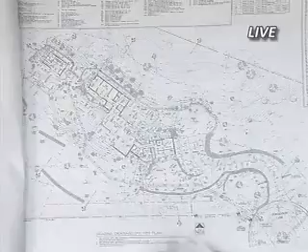And Mike's got all the calculations that are needed. Yeah, we turned that in to whoever needed that. Who would that be? The planning, I guess. And Jaime, I guess, has reviewed that. So as we have this site plan out, we'll go to the architecture and come back to the landscape plan.

But what we have is this gate. I'm not sure that we had it on there last time, so we're going to be adding this gate, and it's coming over 20 feet, so cars can pull up in here. This is just a refined grading plan, basically what we had last time, but now the engineer has gone over all of it. And landscape plan to go with it. Cabana's out here. Nothing has changed as far as the location of things. It's just been refined here. Okay.

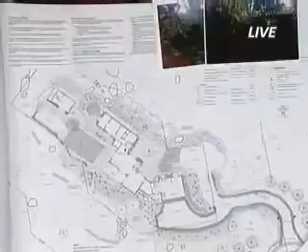Do you want to do landscape first or last? Does it matter? If we could do landscape, yeah. Okay. So, once again, what we were trying to do was keep most of the site, which is 4 acres, of the rocks and the grasses and the oak trees. That was the goal. However, we were unable to do that right at the house, and we did have some program things such as a badminton court in a flat area. So we've kept all the landscaping within this graded area. After that, it just stays the same. It gets weed whacked every June.

So with the graded areas, the cut and the fill areas, the theme has been using drought-tolerant plants, basically succulents and aloes, euphorbias, and this whole list we've put on here. Besides those areas, we have the turf areas for the badminton court, and some transitional turf areas on a bigger slope, which is, Brooke, what do we have on those? Carex praegracilis. It's a native field sedge. It's around the lawn area and in the courtyard, and then up in this area here.

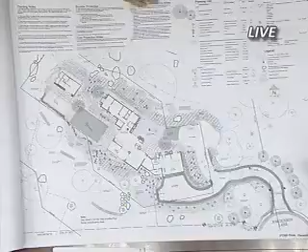We have, between the turfs and the succulents, a few specimen trees, jacarandas, and then a lot of flagstone. And then it fades into a seeded area of native grasses and flowers into what is now, let's call it, naturalized grasses. We're moving whatever boulders we get here and can save all the ones that are exposed with lichens and all those great things. We're going to carefully pile them up and put them back into the landscape.

So we don't have a lot of drip irrigation. We have drip irrigation—where is that? Where did I find that? Next one.

We have it set up for any native plants or plants that need it to start growing, but that's really the main purpose of it. We'll have it for the specimen trees, but most of the succulent area doesn't need it and is actually problematic with too much water. So we've got zones ready for drip irrigation.

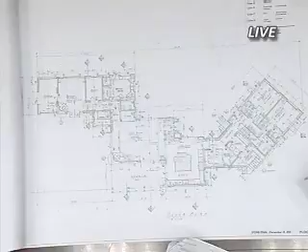On to the architecture. This is what you saw before, but in a little more detail. We've got all the structural plans to go with it. We've got the kids' bedroom wing with a garage and basement underneath that wing. Everything else is slab-on-grade. Master bedroom wing and the loggia, sort of the main room out front. These are little loft spaces. Here's the garage and the basement area, which is buried. This really hasn't changed much.

It's all two-piece Mexican tile, handmade Mexican tile on top. Door schedules—garage doors are a wood 3-panel raised door.

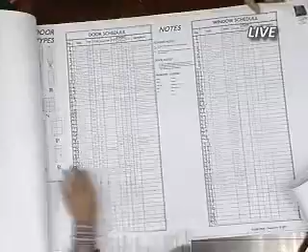We were asked to bring in some tile samples and plaster samples. So the plaster color is this—it's the body color, we had it made for this job. It actually gets a lot more mottled. It's so rich that as you put it on, it doesn't look like it was just painted. It varies, which is what we're looking for.

We have tile covering this bridge area here, which I'll show you, in these colors. And then we have the entry—around the entry vestibule are a mixture of these. We have full color drawings coming up here.

We've submitted a color board. I don't see it over here—is it? Okay, so if you want to look at that, why don't we pull that out now, since we're on colors.

So we have plaster. The windows are a dark color because we're really going to play off all these plants and the greens on the property. The ironwork is a dark purple, the lamp ironwork is black, and the colored concrete is a sort of mix—the loggia, which is all poured concrete, has colors taken out of the plaster.

Cross sections, I think we looked at all those last time. The entry is somewhere hidden here—where did I put that entry? Here. Tile entry here would have these tiles all over it.

There's the cabana with photovoltaic cells on the roof. We've got an option for them if we can afford them. This is just to give you the overall plan—I did make a few changes on this. It's confusing looking at those quarter-inch drawings; for instance, that one went down, and it did on the last plans too. That turned square. But basically, there's the size of the building, all together in one piece.

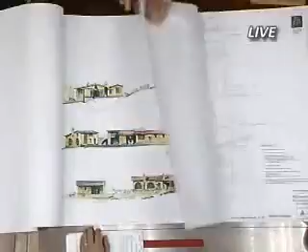Details—these eave details have a tile like this underneath that wraps here. This part gets covered by the gutter, but you can see it from underneath. Here it is.

The walls are all 12 inches thick, plus the plaster, so they end up being almost 14. These are the weep screed details with this 3/4 inch paver. Just some general idea of the plaster—we'll take care of that in the field, but that gets them in the ballpark.

Fireplaces—interiors you probably don't care about. Exteriors are simple, a copper lid here. Then here's a whirligig you asked me to draw—it's a bicycle wheel or something with tuna cans on it. That's over the kids' room.

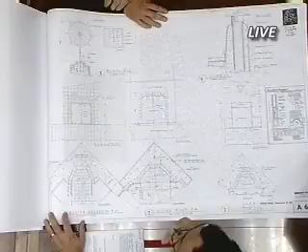Actually, I noticed, I opened this up today, and this is actually the entry—these two tiles go switched. This one goes here, and this one is here. So the tiles got flopped. This is around the entry, and this is on the bridge in the eaves. So when you take a set, take this one—it's got that mark on it.

Lamps we went over last time. The main thing is there's amber glass in here, so we don't get any light shooting across the property.

We've got the balcony over at the kids' room, which is this one, and also the guardrail that goes around the deck. There's all this 1 inch—what would we end up doing? A 3/4 inch rod.

Here's the front gate on sheet 7.2—that's the entry gate, it's the Corten. It's 5 feet tall, solid, that will roll past. We've got some very loose stone walls on either side of it with 3/4 inch rebar sticking up through it, but it'll rust also.

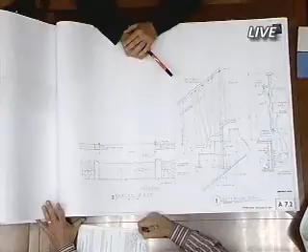And we have a whole set of engineering drawings. Our main concrete work is on S2.0. It shows the retaining we need to do in order to sneak this garage in. The rest of it is on a flat pad and is slab on grade. So you're welcome to go through those, but it's basically what you just saw.

Anything else for your presentation? I think that's it. Okay, so I'll go to the staff and see if they have comments. Has staff reviewed these drawings, the ones that are on the desk right now, other than that one detail sheet that just came in? Okay.

I will go to public comment. Is there anybody here that would like to speak on the project? I don't have any slips. Nobody's standing up, so I'll bring it back to staff for their recognition of a letter for our file.

Thank you, Mr. Chair. I just wanted to bring to the board's attention, we received a letter from Jill Stein and David Unger, a neighbor at 575 Mountain Drive. This is their second letter received for this project. The first letter was actually received the day after the first initial hearing back in April. They just wanted to highlight some of their continuing concerns, primarily the neighborhood compatibility for a two-story design in a dominantly one-story neighborhood. They have concerns with their potential loss of private views, and of course acknowledge that the board has limited jurisdiction over private views.

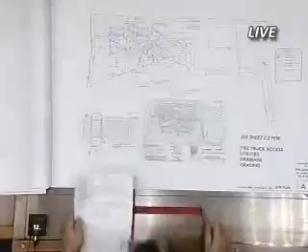There's a 5-foot fence, and it connects, goes right to there. And then on this side, that's the fence connection, goes up to here. Okay, all right, and that's the fence. We'd rather not have a fence, but we need a fence for the pool. So we're having that fence here.

Our idea wasn't to fence the whole property, it was to keep it more casual as you drove in. I should have shown that fading off, this stone fading off. The idea is mainly to keep people from parking their car and just wandering through. This isn't a code requirement here.

Okay, Fred, you had some questions? Yes, Mr. Chair, just to help address the neighbor letter. Jeff, could you point out on sheet A1.2 where the neighbor is that wrote the letter? Do we know where that neighbor is? I just heard this letter for the first time, so I imagine it's one of these houses on Mountain Drive. Are these addressed on Mountain Drive here? Yeah, 575 Mountain Drive is the address. I couldn't tell you, that's a surprise because this whole thing was...

The only reason I'm asking is the issue of story poles came in their letter, and certainly this board could ask you to do story poles, but on the other hand we've had circumstances where people write letters in, and it turns out if you go out and look at the site, they don't even see the site. So that's why I was trying to figure out where this person was that was writing the letter.

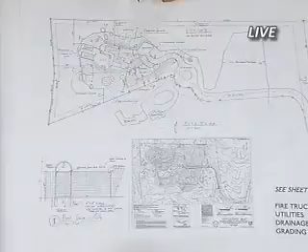Okay, and what kind of windows are you using? They're aluminum-clad wood windows, probably Eagle windows. Yeah, and that's a piece from the Eagle catalog. And are you using the traditional detailing on the windows? I know that some of them come fairly wide, and others the division is smaller. I usually use the 1-inch detail, and then I use the square on the inside.

Is that traditional? I don't know. That house is over here, by the way. That 575 is not in view, it's over by the road, so the people who would... that's downhill, you can't see it. These houses are the closest houses. I think what we have to do is make a comment as a board that we made our decision, and we didn't think the requirement to have story poles was something we needed to decide, unless somebody feels differently, but I think it was this board that voted on this project.

So has Ann Marks looked at your landscape plan? No, has she looked at it yet? No, I don't think she has.

Light construction, comp shingles, very, very simple house. The neighborhood looks like this. This is the existing house, and this is looking down to the left of the existing house. This kind of turns the corner, as you can see slightly. Here's a shot looking the other direction towards the east.

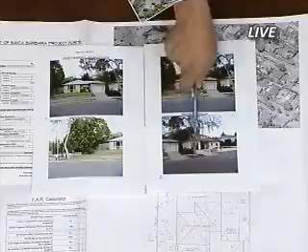There's the house, and then as you can see, there's the garage, the single-car garage, and then looking a little to the east, that was a one-story house that's got a little two-story addition recently remodeled. Looking further to the west, this is the neighboring house, which is really sort of engulfed with vegetation. It's a cute little house that sits right where San Miguel kind of turns slightly. And then further down San Miguel, this is a two-story house that's been around for a while.

Let's see, looking right across the street, these are homes, one-story homes right across the street on San Miguel. And then this is looking down Las Ondas, and there's another neighboring two-story home on the bottom of the page there. That should give a little neighborhood context.

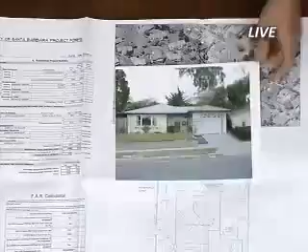I've got some photos of the home I'll go through quickly so we can kind of see what we're dealing with. This is the one-story plastered home, 2x4 construction. Some windows have been upgraded. The existing frontage is original. So slab on grade, very simple home. Some more shots. This is the front, where the sidewalk meets a low retaining wall.

This is a shot looking down into the side yard on the west side. There's a shed structure that's being removed that was placed without a permit. This is the side yard looking down the east side, the neighboring home there, and the gates going into the neighboring yard as well. And then this is a shot looking back into the rear yard.

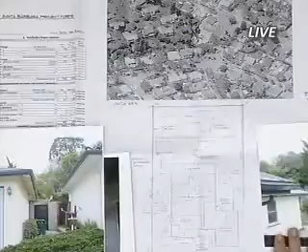So the idea here is to add a master suite. It's a small second-story addition, and basically keep the existing floor plan right intact. Really very little is happening to the floor plan on the existing residence. You can see on the first floor plan here, we've got really the bulk of the house stays as it is. Of course, the interiors will be updated, but the stud walls and structure will stay the same.

The staircase is to the center of the house. We've got to the west an existing patio where we'll create a new hipped roof over the existing patio, and put in two small back-to-back fireplaces. Let's see, we'll replace the windows and doors, and we'll add a pair of doors out the back of the garage to give access to the rear yard. So in terms of the mass of the first floor, it's really what you're looking at now.

The design approach is to put the master suite right over the center of the building and allow roof line all around it. And the stairway comes up in a position so that you can get to the balcony without going through the master. The master bedroom faces straight out to the south, we'll call it, onto a private terrace. And then to the north and to the east is the master closet and the master bath.

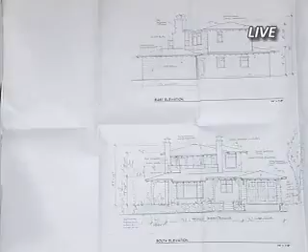The windows will be the prairie-style windows, as you see. We'll put a carriage house door on the garage, comp shingles. The chimneys are smooth plaster, metal casement windows, and then some heavy timber elements such as some corbels and columns. We've got some corbels occurring over the garage door, over some of the eyebrow projections. There's a few eyebrow projections that work their way around at some of the extended roof areas where we need a little sun protection.

The second floor has got a guardrail which consists of a partial solid guardrail and then a narrow band of glass. And you can see that works its way around the east and the west side, but predominantly is exposed on the south side. The west elevation has a heavy timber projected covered patio. And then again, just sort of the mix of the plaster and the horizontal siding. The plates are 9'6" from floor to floor, 3 and 12 pitch. The max height we're dealing with is 21 feet, so it's a pretty low structure.

Second floor, 8-foot plate. I think that's a pretty good description of it. Anything else for your presentation? I think that's it. All right, thank you. Are there any staff comments on this project? It looks like it's ready for action. Yeah, it is ready for action.

I just wanted to bring one aspect up, mostly for the applicant's reference. This was discussed internally by staff, and prior to issuance of a building permit, you'll have to submit a complete demo plan to show that at least 50% of the existing walls are going to remain. Otherwise, you would have to bring your parking into compliance and provide 2 spaces. So at this point, he's provided us a letter that says that 50% or more will remain, but we need to see it in plan.

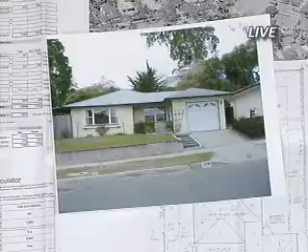Okay. There's a shot of it here. It definitely needs to be updated. Right now, the plan is to just maintain this existing entry. The steps, the location, these would be redone. Whether that wall is replaced or treated is kind of under discussion.

Okay. On your sheet 2.0, if you look at the elevation, it looks like you're proposing to move over the sidewalk a little bit and put a planter between there and the driveway. That's where I saw the note. It says new stone wall. Yeah, and that could be a treated wall, but I need to see where the setback hits that. It's something that we're sorting through.

And then maybe it should have been a question, but a comment on your little westerly patio cover, which is essentially there today. There's a covered patio. Is your intention to leave that open, view from the street, or will there be a little fence around that? I'm looking on the left-hand side of your elevation. Yeah, the intention is to have a fence there, and it shows up on the site plan.

I took it off on the elevation just to look beyond the building. So the way you've drawn it on the site plan, the fence would be kind of right at the patio, not out in front of it a little bit. Yes, exactly. Well, since I started on comments, I'll just go my way and go to Jim. My only two comments on the architecture: I certainly think the bungalow style is probably in keeping with some of the other houses in the neighborhood.

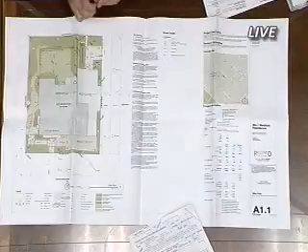Okay. Well, we're looking at an existing residence. It's got a half-exposed basement. It's part of a craftsman bungalow court. We're proposing some changes. The project was owned by a previous owner, and they had started some of the renovation work, and it was purchased mid-renovation, and we're picking up from where it was left off.

And so some of the grading is just fixing drainage in the rear yard. Some of the other exterior changes are removing a fence line along the front here and moving it back to the back corner, replacing some fencing along Olive Street as well, and replacing a guardrail with a fence slash guardrail where there's a big drop off over here.

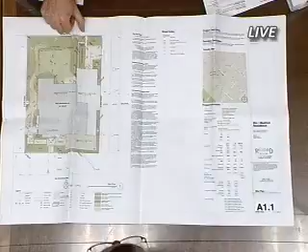So just moving on to the plan. Yes, maybe you might want to walk us through the photos a little bit. Sure, I can do that, yeah. So here are some street elevations.

This is the residence on the corner over here. This is the, let's see, Olive Street elevation. Yep. And then the same view off of Micheltorena. And as you can see, it's almost identical to all the neighboring bungalows. So the renovation is to the upper level, and addition is to the lower level. So the upper level is one bedroom, living, dining, and kitchen.

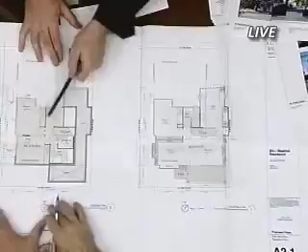We're proposing a new exit out, sort of a back kitchen door to the upper terrace of the yard that then has access out onto Olive Street. On the lower level, it's adding basically two bedrooms and a little study and a bathroom with access to the backyard and then interior access to the upper level. It's a pretty compact living.

Let's see the elevations. We are proposing one new skylight in the kitchen. We've put it on the slope facing the interior yard. So the exterior changes, some of the changes had already taken place. Some of the windows had been replaced, so we're replacing additional windows, keeping with the same color that was picked already. So the front of the residence facing Micheltorena, there's no changes other than color changes proposed.

And going around to the Olive Street elevation, there's a fireplace that's already been demolished. Deleting a window in the kitchen area, replacing a couple of windows here, adding a new window. Where there was a previous window in that location, we're just adding a slightly larger window to serve the kitchen. And then moving on to the interior facing sides of the home. This is an existing window. We're matching it in the bedroom below. We're adding windows on either side of this little projection here. That's these two windows here.

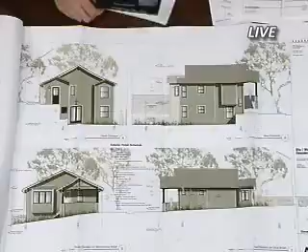And let's see, so adding the additional door downstairs here, that's the one that exits out from the study below, and that's the new back door from the upper terrace and leading out to Olive Street. I think basically the addition is entirely within the volume of the existing residence, so there's no additional volume proposed to the residence. I think that's pretty much it. Okay, so that concludes the presentation.

Are there staff comments on this item? I do see it says zoning modifications, so we'll ask the applicant to kind of walk us through those specifics. Okay. Sure. At this point, I'll open up public comment. I don't have any slips. I don't see anybody jumping up. So I'll close public comment, bring it back to the board for their questions.

Yes, Fred. First at my end. First of all, this is the sad little house that's finally going to get some attention. Every time I drive by it, I want to stop and go fix something on it. Question, on your elevation studies, I couldn't figure out where it was. On your west elevation, there is what appears to be a fence element. Where is that in plan?

Yes, that's the step between the upper and the lower yard. It's basically a guardrail serving the drop-off. So it's right here. Yes. Okay. I'll show you just on the site photos. We've got an existing retaining wall that's in. Here we go. So that's the existing retaining wall. That's the fence that we're replacing, basically, and dressing up this retaining wall in the process.

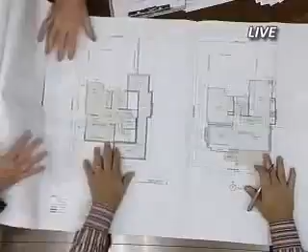What we're proposing is new square footage within the two front yards - one facing Olive Street and one facing Mitchell Terrace. This is all underneath the house, within the volume of the existing residence. So those would be the two areas, basically expanding within the setbacks.

There are a few other items when we start changing elements within those setbacks, such as adding a window, deleting another window, and adding the little kitchen door in the back - those all fall under that as well, requiring approval. Also, that fence you asked about before is within the setback as well, and it exceeds 3.5 feet because it's going down and dressing up the retaining wall.

Any other changes to windows other than on the Olive Street side? Anything on the front side? Is it popping up as a change? It's already been changed, so none of those are requiring a modification. Perhaps this window here, I'm not sure, because it's right at the setback line. So it's a possibility that that could require it. Okay.

So we got our questions out. How about comments? How's the board feeling about this proposal?

Brian? My only comment is I'd like to see how you detail that little stairway coming up, because based on this, it looks kind of spindly compared to the style of the house. I look forward to seeing how that stairway is detailed out. I'm afraid it's going to be two stringers and boards, kind of a 70s look - I'd like to see that avoided, and for you to study this period of time, how they actually constructed stairways to porches, so it's harmonious with the style of the house. Otherwise, I think it's great.

I love it. One comment I'll make is, I don't know if everybody recognized, but this is going to be your house - actually, no. No, I do live in this bungalow court, another house right over here. So it's the same name as - I'm Matt Eastwood, so Matthew Bio is the owner. Okay, yeah, we've got the same first names. Gotcha, okay.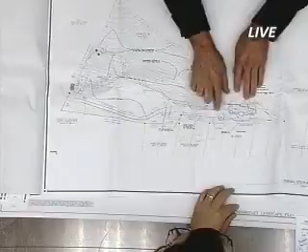This is the last lot at the end of this property. You come down a very long driveway to the buildable envelope. Here you can see the footprint of the house tucked into the side of the hill, an existing oak tree. And what we're intending to do really is take advantage of panoramic ocean views here from the second floor.

We have met with the neighbors already. We had a meeting with them yesterday, had a good turnout, and I think a very good response.

It's the enlarged plan, you can see at the lower floor - again, driveway, colonnade, entry here into the lower level. We have some on-site pathway, boulders and rocks, very natural materials. The lower retaining wall - this portion is a curb really, with a little bit of retention here, your mechanically reinforced earth or your Allan Block. On the back side would be your traditional retaining walls done with CMU, and then probably plastered with a stone cap where they're visible.

This is the original survey.

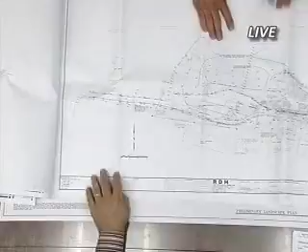Stop me if you have any questions. This is Sam Mathis' preliminary concept drawing for the landscape plan, and Sam has a beautiful colored version he'll present for you underneath there, if you're ready to go to landscape. It's up to you if you want to go there first before the building. Yeah, I think that would be great. Okay, it tells us a lot about the building.

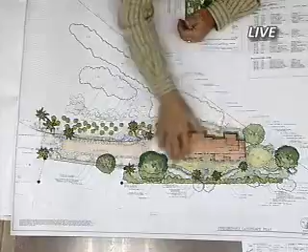So as John mentioned, we're at the end of this long drive, and one of the important things, of course, was screening for the neighbors below and for our property. The existing materials that we'll be keeping, certainly this big oak tree that John mentioned, an avocado tree. There's multiple citrus planted in this area now that we'll be taking up and transplanting into an existing orchard.

That's in the kind of foreground as you approach the house upslope, so we're going to add those citrus into that area and add some more through this access on the back, as John mentioned, to the top deck area from the outside. Coming up from Lou Dillon, there's a beautiful existing drive that has a lot of natural stone walls and Kentia palms and cycads. It's a very handsome entrance approach to this property, and we want to use that theme as kind of our basis of the design of a water-wise, certainly fire-resistant landscape, but kind of in the semi-tropical realm of theme with the Kentia palms, cycads, agave.

We also want to use natives and low-growing ground covers for our fuel management, such as Myoporum and the low-growing Ceanothus. The screening below is important for the neighbors that, as John mentioned, we met with and have worked on very strategically in terms of sight lines and privacy for these backyards, for us looking down and for them looking back. The intent is to use a Prunus lyonii or a Rhamnus alaternus, an Italian buckthorn type of tough hedge that we can let get up to about 10, 12 feet, which is, I think, the ideal height for this important screen below.

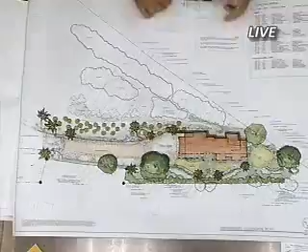I've brought some pictures to show the kinds of planting. Again, real quickly, the Kentia palms, the Trachycarpus palms, the Acacia stenophylla, and maybe the olive. But much of the trees that I show here are going to remain, so we don't need to embellish much except for maybe the palms.

We'll be using, again, ligustrum as well as the Italian buckthorn for hedging. The Rhus ovata is what's really growing on this back slope, so we'll be adding more of that to kind of help retain and look for some substantial erosion control in the upper slope.

We do have a concrete drainage swale to make sure that the house is protected from the sheet flow off this big slope that's behind, but it'll be concealed for the most part with our low-growing ground cover. We'll be using Ceanothus, Yankee Point, and rosemary, and some Acacia redolens to actually hold the bank, but the main ground cover will be the low Myoporum.

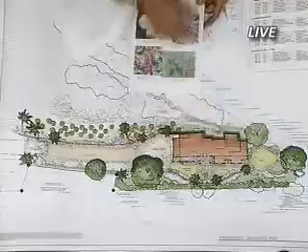Accents would be lavenders and agave and some succulents, some low-growing spreading roses and bougainvilleas on this upper wall and lower wall to kind of cascade over and add to the beautiful theme that John and the clients have asked us to give them something that's real Santa Barbara. The front gates, kind of the first impression as you come in, I think our idea is to have stucco with an iron gate right here that'll be very open.

And we'll have a small stucco 2-foot wall with a stone cap on this upper side with our bioswale. So that just gives you an idea of the theme. This is a little bit of a theme on another project we've done of this kind of open walkway with a little bit of a header on the uphill side, but stone steps and just a real more organic approach to the back slope because it is so narrow. So, all right, it's kind of the general theme of the site.

Okay, so let's move to the architecture. And we have included in this submittal a copy of the PC resolution. I don't think we're really going through that today. If you could actually kind of highlight what items were, because I don't have a copy of the PC report yet. Okay, but if you know what we're addressing, I want to make sure that we meet their guidelines. Okay. The requirements. Mr. Chair, if I was going to do a staff presentation. Just go briefly. Okay, we'll do that then. Let me know when ready.

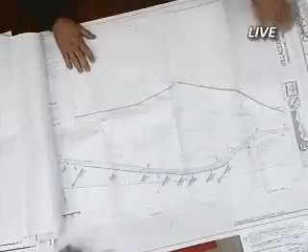Okay. So we have Len Erie as our civil engineer. Len's done all the preliminary grading and drainage for the site already for the road, which is being expanded to 16 feet for the PC resolution for access to the site. Again, we have a drainage swale across the back to catch downhill water, again for the PC resolution, which meets that requirement. I think if we're in reference to the resolution, Sam has addressed most of the screening and landscape elements as well. These are a couple of little details. We're trying to use naturally stacked gravity walls where possible.

Yeah, we have some architecture. So as you approach the site, you come in through the entry to the entry foyer. The entry foyer has 3 vertical windows here that you can see from the upstairs plan in the staircase up to the upper level. We've situated the living room, kitchen, and master suite on the upper level for all the views. Down at the lower level, then, of course, we have the garage, the foyer, the laundry room, and 2 bedrooms, 2 baths.

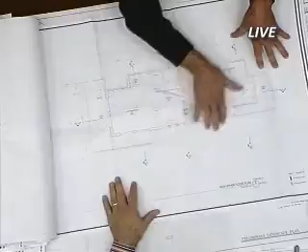On the upper level, as you ascend up the staircase, you have the 3 vertical windows. There will be a light well here, landscaped per Sam's recommendations when we get to that level. You enter directly into the living room, which has double pairs of sliding doors, again for the ocean views, a wraparound deck for that one-story element. You enter then into the master suite, which is very ample, a master closet, and master bath. Again, a wraparound deck at the master suite for the one-story element, and the roof lines of the entry foyer and the lower bedrooms are the one-story element on the lower level.

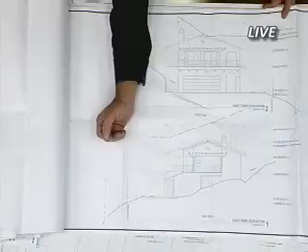The elevation at the top is your elevation from the driveway. So again, simple gable roof, a wooden trellis over the main deck. We have corbelled overhang and arched colonnade. Above we have also a loggia, just to carry the line straight up and carry the columns up, changing from 22 inches below to probably 16 inches above. The east side would be the master suite, again with a wood trellis over the deck, and trying to keep a very simple Spanish human scale feel to the architecture.

These are our building sections. This is your longitudinal section. This is a section through the garage area and the living room, showing your archways and your loggia. Again, then you can see the hillside and where you're retaining, and the small retaining wall in the front yard and the property line.

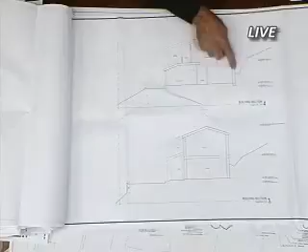This elevation is through the east side of the house where you have the lower bedrooms, master bath, master closet. Again, the short curb wall, your retained earth at that elevation in the back side. And that's kind of it. Okay, thank you. I think that's a pretty good overall presentation.

At this point, I'll bring it to Michelle, who I think has some staff comments on this project. Yes, thank you, Mr. Chair. I just wanted to bring to the board's attention this lot was created as part of a subdivision that was approved by the Planning Commission in 2003. The parcel has a very strict development envelope, which I believe they touched on. It also restricted the size of the residence to 2,500 square feet, which they're in conformance with.

And particularly just wanted to note that there's a few items, such as the guest parking that's currently identified as located in the front setback, that has to be removed from the setback, and all site work, walls, paths, exterior, that's located outside of the building envelope must also be removed. So those are just some items that are needing to be further refined in future review. I'd like to comment on those if I could. Could we flip back over to the site plan?

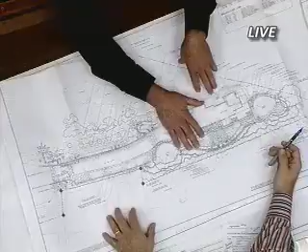The previous design that set that envelope had 390 cubic yards of cut and export and only less than 100 of fill. This design is a balanced site. We have, I think it's, I'd have to look at the front sheet, 190 cubic yards of cut and balanced fill. And the way we achieved it then was this portion here. So my email to Danny Cato was to ask him how I could approach this. And his comment to me was that if we can reach a determination of substantial conformance, that he would entertain that.

Okay. And I see my colleagues, I wanted to point out, especially on camera, the development envelope, just to make sure that we all understand that. Is there a plan that, what sheet is that on? T.02, Glenn. I don't think mine shows the development envelope as strong. It's kind of deceiving because this doesn't have arrows on it. Here it is. What this is doing, right, these curvy lines here are pointing at the line of the development envelope.

This dashed line is your envelope right here. It's this one right here. Yes. Correct. Coming around like so, and then up here. It's a little confusing. Okay, so that's what we're talking about. Okay.

I'd like to open up. I'd like to make one more comment. It didn't appear to me from the diagram on the PC resolution that their requirement for open space had been planned for. I couldn't really see how you'd even get the requirement met. So again, by achieving this bulb out, if we can get substantial conformance there, we more than provide for the open space requirement. Okay. At this point, I'm going to open up public comment.

And Sam, is it possible you could move to that seat, and then we'll have that seat open for public. I've got two slips. In no particular order, Kathy Morgan, if you could come up to this chair and speak into the mic, and you'll have 2 minutes to make comments. If you could just speak right into the mic. Sure. My name is Kathy Morgan, and I live at 473 Scenic, which is this lot here, number 8. Number 8. So on camera, you're right here. Correct. Okay.

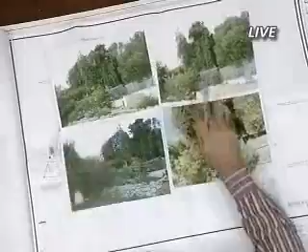But as you can see where the gate is falling down, the dirt level is just very, very high. It's almost at the top of the gate there. And my impression is that this retaining wall is going to raise the building pad another 4.5 feet. We'll ask that question. Okay. We'll go through that.

But I'm not sure what sort of grading has gone on that property over the past several years. But a lot of the dirt is loose and is pushing the gate over, and it seems like they've made the building pad to maximize views and height. But my concern is just that it puts that house just that much higher over the neighbors. And all the houses on Scenic are quite modest.

I think most of our homes are 1,500 square feet, 50s and 60s style homes. So when you drive up Harbor View and turn onto Scenic Drive, this house will be very visible in the neighborhood, and I think that it will definitely stand out as just a different, very different style, very different scale than the modest homes on our street.

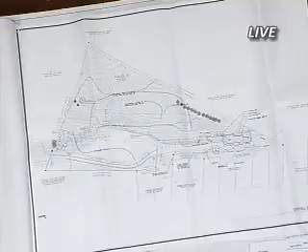Good afternoon, Mr. Chair and Board. I'm the neighbor that is most easterly at the very point below this property. Right here? Right there. And I've seen all iterations of this project since it started in 2003, and this is actually the project that got me interested in public service and onto Planning Commission, so it's been an important one for me. I think this is the best iteration that we've seen. This is now the third house plan.

I just want to make sure that you're aware of the Planning Commission resolution from 2003, that Planning Commission realized this was a very constrained site because of the earthquake fault and the proximity to the neighbors with a very narrow building envelope. What's different about this hillside site, it's not like the Riviera where you have a street where you have houses above and houses below. Here you have a driveway, a house above that looks into everybody's private backyards. So it's not like the houses below have a street frontage to buffer you.

And their building pad is approximately 20 feet above the backyards of the houses below, and then obviously doing a two-story house that's upside down with all the living area and decks on the upper floor, you're up 30 feet above and in very close proximity. So that was the reason Planning Commission wanted a small house. They envisioned this as the little house at the end of the lane, and that's why it was limited to 2,500 square feet. I appreciate the applicant meeting with us and working with the neighbors. I think they've done a good job with the landscape and the design of the house.

I think the questions that we expressed to the owner were to justify or clarify the difference between the 2,500 square foot net that they're proposing and the gross, which is like 31% higher, which seems like a very big jump. That would equate to like 4-foot thick walls. So I think that the gross footage appears a little bit high, and I share some of the concerns that were mentioned by staff in terms of the proximity of walls to that lower property line, but I do think the landscape plan is making a good attempt at creating privacy for the neighbors. We all want privacy, and I'd like to work with the applicant to achieve that in a cooperative way.

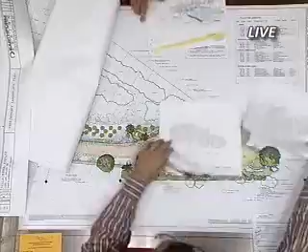As I'm looking here, it says that it's in a high fire area, and I didn't see any zones or anything on your landscape plan, and you'll have to get it through Ann Marks, I suppose. Certainly, the intent would be that she'll see everything in that 30-foot ring as well as the 70-foot ring. We're being very respectful of that. That's why there's no trees close in.

I'm just curious. I don't know what she'll do with this continuous hedge line along here. But something to run by her. Yes. And see about that. And that's also part of the resolution. So I was just going through these, and the only other one that struck me, one second if you'll bear with me. Is any fencing going on? No. No fencing on the property? Okay.

And then it says no construction or improvement on the real property which would lead to soil disturbance shall be allowed in the area for which the development rights have been restricted. I think this is the area here that we're kind of talking about. We've got to have the board members just weigh in on their opinions on that. Okay. Thank you. All right. Questions? Comments?

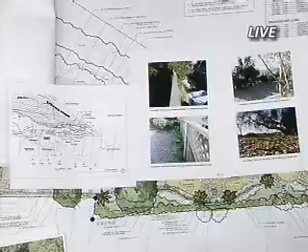So A and B, this is from Old Coast Highway by the Montecito Country Club Golf Course. And you would really not be able to see this building from that location. I'm sure if you went up and down the highway, you could find a rooftop somewhere. This is at the intersection of Scenic Drive and Harbor View. Again, even with just the existing landscaping, you would not be able to see this project, mainly because of the oak tree, which you see here, and the house being further to the left behind this existing landscaping.

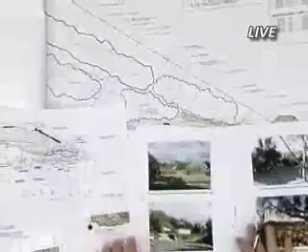Then at the neighbor's request, I did a photo series study of the whole streetscape on Scenic Drive. And really the only thing to ascertain from these is that you can't see the site from Scenic Drive. This photo is taken from the master bedroom deck elevation. We have the opportunity with that hillside to walk up to the elevation of the first floor. So this photograph is taken from the correct elevation of the master deck, looking down at the property of the woman who gave testimony earlier. This is looking at her property from that deck.

It's a large Eugenia, I think? This is a large Eugenia that I referred to previously that's very healthy, and that will remain. This is that Myoporum that's in decline right next to it. But that's where we'd be supplementing along this whole stretch, the lower south line, with additional and very substantial screening. But this will stay, the oak will stay, and as much healthy material along that line will stay.

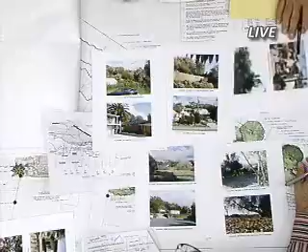The only thing that would be visible there would be the parking area, the guest parking, which is now going away. So really there is no view of a structure from this location. This is the view, again, from the master bedroom deck at the same elevation of that corner lot where Mr. Bartlett has his property. That's, I believe, his bougainvillea there. And this is a photograph from the neighbor's driveway looking across his backyard at the site.

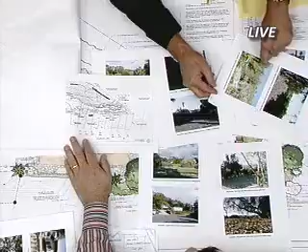So are these trees on his property or? Pardon me for a minute. No, that's the Eugenia on our property that we were talking about earlier. That on site is right here. Right. So that photo is taken from right where the stamp is, this way.

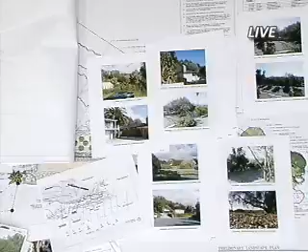It appears some of our discussion is going to center around this desire to take the land out over that development line. Do you have a little background of how that development line was set, or will they have to, if we generally might agree with that notion, get a modification? What's the detail? The development envelope was established by the Planning Commission during the 2003 Planning Commission approval of the subdivision. At this point it's in debate, as John mentioned.

They could proceed with a substantial conformance determination that would possibly be processed by staff, or maybe a PC-level substantial conformance determination, to determine whether or not the site improvements meet the objective and intent of the original Planning Commission resolution.

Denise? Yes, Mr. Chair, I just had a question for the client. Is this the Eugenia that's covered with vines growing up into it, and is that the Myoporum in question? This is from Miss Kathy Morgan's pictures that she brought in. This could be—yeah, from that perspective I haven't seen it from that location. And besides the Myoporum, any other trees going, that you can see within that block of foliage there?

Going, meaning being taken out? Yes, that you're taking out. 'Cause some of them look like they might be right in your building envelope. Well, I think these are those citrus trees lined up right here on the site, and those need to be removed just for our front building south elevation line. Those we're going to be putting here, and then we're bringing in palms and other vines and things on the front. But we also, at the base of that fence on our side, will be growing up our hedge. That'll take the place of what you're seeing in the foliage here.

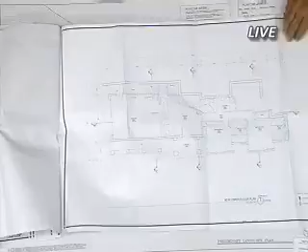Questions, additional? I'd like, I know we talked about the site, but I have some architectural questions.

Am I reading this right? There's 3 windows shown at the staircase, and if I look at the north elevation, the back elevation, those essentially are following the staircase down. And then it's hard to tell from the drawings, but are some of these windows casement windows, sliders? What's the intent? Fixed windows. So they're all fixed windows? No, just the staircase windows.

Okay, but I mean, just in general, is there a combination of casement, sliding or casements? Casement, sliding doors at the decks, and then all the other windows in bedrooms and other rooms would be casement windows. Okay, thank you.

Okay, so any other questions? If not, move to comments.

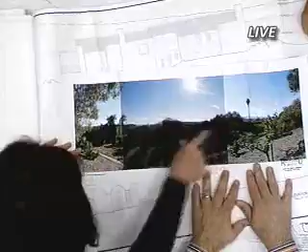Some more questions. I see this wonderful thing here, and I just needed some clarification, because what I'm seeing, I think, is the fence line that the lady that spoke was speaking of down below. Is that correct? It's at the property line, and then does this bend out here and then come up? It's a little distortion from the photograph.

Yeah, that's what I thought. But this is actually a straight line concrete swale that's existing. It exits to the drainage correct.

Oh okay, I was going to ask, is that like a? It doesn't look like it's, it's maybe 2 feet wide. It's a little concrete flat swale that runs across the site, and it drains to the west. Wonder how effective that is. Okay, so it's a little bit deceiving, but this really just slopes continuously down.

Is that correct? Correct. Okay, and then a little bench out probably for this. But that's it. Okay, thank you. Okay, let's move to comments.

Well, I'd like to see some 2 or 3 sections, especially where we have the stone retaining walls, be through here. And then I think the grade at the neighboring properties should be called out.

Is there a survey that actually? It is called out on the sheet here, because I just found it. Okay, but go ahead, Jim.

I think it might be a loose sheet that's in there. I think a couple sections through where the retaining wall is would be a big help. Here we are, we've got. Well, was this it? This wasn't it. It was when we found that 102.

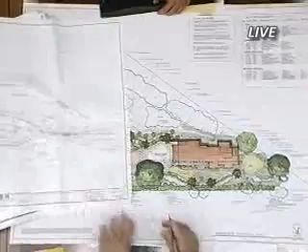So, Jim, I'd like to follow up on that. I mean, I would like to see site sections from the entire property down to the buildings in several locations. How about if I extend the building sections that exist? There's one here, and there's one here, as long as it goes all the way through and then it shows accurately retaining walls and screening and property lines.

Well, we don't have topo work on these properties, but we'll get a good idea of the adjacent grade and the improvements and the general analysis. We really don't have any information at this time. We don't either. That's what we're asking for, topos or retaining walls on these properties. Excuse me.

But you do have fence. You've got some topo marks there, 2 spot elevations, 102.97 on C3, and 100 kind of passes along the property line down here. So some of these properties continue to slope down on the other side of the fence, some are retained and drop off. There's probably 3 or 4 different conditions across that property line. Okay, that's why we want to see.

Okay, Jim, continue. Is that your biggest comment? No, that's fine. Okay, what was the comment about grading again? I got the sections, and someone wanted to see some more information about grade.

I think what I heard everyone saying is we want to see some sections as far down as you can get within reason with elevations, and you may need to go get some survey marks at some of the adjacent properties.

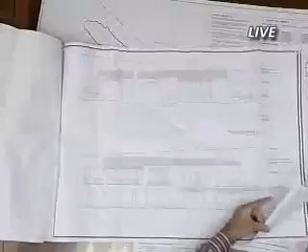Brian's absolutely correct about how the balconies, terraces, and all of the massing elements should align or work out better than they do. But this particular element here, I'm confused as to how that would even work detail-wise. It seems like it's just a straight cantilever off of this side, and it looks like it's just in stucco, and this is so non-traditional. It just doesn't help the project.

So I would encourage that to be resolved. There are some other things on the side elevations that also give me concern about where the heights of roofs are, because the way this elevation is, this door actually looks like it's touching the roof tile. So structurally, there has to be something else going on there, or this door is lower, or that roof is higher to make that work. And that's concerning me about the roofs and how they would work together.

Mr. Chair, do you have, while you're on that sheet, maybe others might have comments. Is anyone concerned about the general design of the trellises at both the balconies? I just don't think they're thought through 100% yet, the way posts and corbels might work together. Well, the size and thickness and the detailing as well. Yeah, the detailing is just not quite at the level I think it really needs to be to pull this off successfully.

One solution with the arches would be: when the arch comes down to the spring line, maybe have stone columns. You really don't define anything happening there, you just have two lines. So, stone columns, or heavier details, I think heavier details.

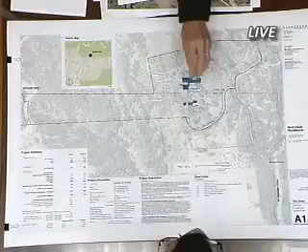The 10.5 acres, if you look in the vicinity, you'll see that below it is Mountain Drive. This property is accessed by a 1,300-foot driveway from Mountain Drive, and the existing house site with its abutting proposed house site is at the rear of a more or less flat spot from Mountain Drive. Neither the former nor the proposed locations of structures were visible from Mountain Drive, nor would they be visible now because of existing vegetation, tall trees in here, and we'll show that in the photos and in the section so you get a sense of that. So the house is in the middle of 10.5 acres, and there's this flag portion that reaches across the gully.

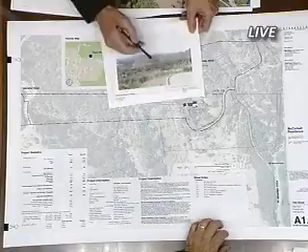If we look at some of the photos that were submitted, I went all along Mountain Drive, and at no point are you able to see the actual footprint or location of the building because of tall trees and vegetation basically surrounding the property on the downhill side, which is more or less flat. So here there are views from Mountain Drive, the driveway entrance from Mountain Drive. From further along Mountain Drive to the west, again you see... Just gonna move a little bit further down so that we're on the camera. That's all. A view of these tall trees, and again we'll see more photos of those. Maybe I'll save some of these.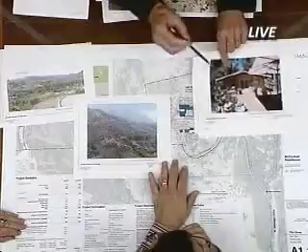The project mentioned a second residence. So again, there are some interesting zoning situations with the parcel because there are 2 residences allowed on one parcel, which is unusual. And in changing this, that's why the project needs to basically apply and discuss with planning to reapply for the same situation that they already had, which was the performance standard permit.

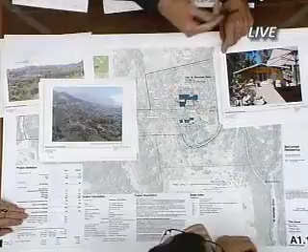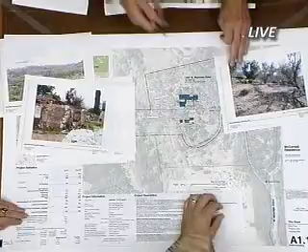So this is the only surviving structure, this small adobe, and as you are probably familiar with from those times, this has got doorways with 5'10" headers and so forth. So all very quaint. Here's some photos of this flat spot with the tall vegetation on the south side. And here's some of the interesting adobe ruins that have since been taken out. The original structure was a rambling affair with indoor and outdoor enclosed spaces, many of which would not be allowed under current zoning because there were spaces completely removed from each other, although the entire house had only one kitchen. You might add that the history book described it as an Andalusian village. And that sense of being broken up and village-like is something we're seeking in the new proposed structure. This is a photo of this adjacent footprint where the owners would like to locate the house.

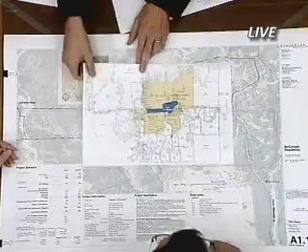I think that gets us there. If we look at the site plan again, here's Mountain Drive down here, a 1,300-foot driveway to get up to the residence. That's a survey. I think the best overview might actually be in some models that we've done that are on page 3.1.

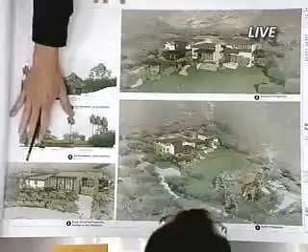So both of these views, I think, show this is the small second residence that would get an addition, but the main house is proposed to be kind of village-like, also with various massing that goes up and down. And the house includes a garage with an art studio above that.

The main entry is on this base level here to the main house, and then on the second floor there are two broken-up elements. On the far end above the master bedroom is a library study that's set back with a porch on the front, and off of this entry portion of the house are quarters and bedrooms for kids and grandkids.

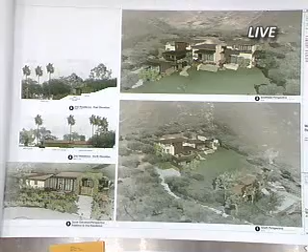Then maybe we switch back to the plan so you could relate more specifically to what that is all about, and we step up through from bottom to top. We've got a garage on this main level. Again, the flat spot here with the existing second residence is here. It slopes up very gently here. These are existing lawns out in some of this area to be retained, and these tall trees are all around.

So we've got a garage and art storage. The family is very involved with art. They're artists and show their art. We come up to this main house level here, and there's what amounts to a bridge that comes across from the upper terrace above the art studio into the main house level. And this is really basically on an existing terrace level.

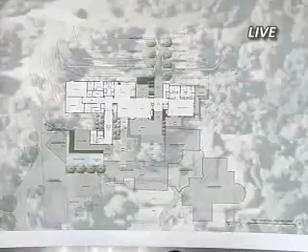There are existing site walls here, and then things would be all on one level in traversing the topography this way, but with the roof heights jumping up and down, and very small patios spread around for great indoor-outdoor connections. This shows the two divided upstairs areas. Really, this is the family bedroom area, and here's a library study area. Most of these spaces have south-facing balconies or terraces, typically with some roof overhang on them.

This is just technically showing the height calculation. We've got slope here, and I think these elevations and sections are informative about that. So this is the main elevation to the south, to the downhill side. This is the westerly elevation, so you can see the garage and study, this entry level here, and the upper level there. This northerly elevation is least developed, but it's basically facing terrace and mountainside.

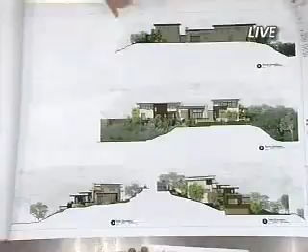And then these sections are always a good tool. They help understand what's going on. So if we start here at section number 1, you'll see the blue is the existing grade, the red is the offset for the height calculation, and then the bermed-in garage storage, and this structure that heads up with a bridge to this upper terrace where the main house is.

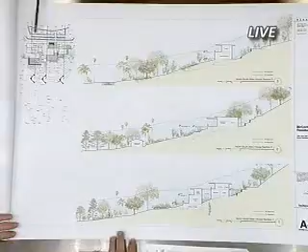And then you've got a section through the middle of the house, which is just a one-story element, again on that terrace, and a section through the far easterly end of the house, which has a master bedroom and a study above. And this tiny plan shows where those sections are taken.

I can cover that second residence as long as we're talking. Sure. All right, that's on the agenda, right? Yeah. Of interest.

It shows on the first plan, this is this existing funky adobe, and the family is really desirous to use it like a guest house, because it's an extended family that lives here in town and out of town too. So what they'd like to do is add on bedrooms and bathrooms and connect that. Their desire really is to have an outdoor connection similar to what was happening with the house before.

And there will be some discussion with the city about the performance standard permit and the ability to work that into existing planning and zoning notions. Typically in the city, everything's urban, so the mentality is to keep people from generating extra living quarters. In this case, it's a 10-acre site, really an estate, with extended family living on site, 2 residences. This is a small second residence that's permitted, and they'd rather have it configured as more of a guest situation.

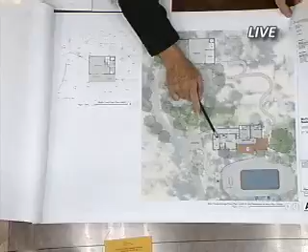Actually adding on and touching this adobe is a technical challenge, certainly, for the structural engineers, and just, as you all probably know, as soon as you start messing with it, it falls to powder. And so we do have elevations of that approach on the... in this sheet.

So from the north, the uphill side, it's more or less bermed, and we're talking about just replicating these. And we know that this kind of model is not great for showing the rustic texture of the existing roof, but hopefully shows the intent for massing and organization. And again, a lot of existing vegetation in the area.

It's strange that big trees, all kinds of bushes, shrubs, and vegetation survived, but when we walked up there, we actually didn't think the house had burned down. All the trees around it, a lot of them had survived. So there we are, and if you have questions, we're happy to fill you in. Thank you. So I'm going to bring it.

Does the staff have comments on this project regarding the performance standard, or what? I could just expand on that. Essentially, this is a single-family residential zoned lot, which only allows one single-family residence. However, there is an exception, which was identified as a performance standard permit, where a single-family residentially zoned parcel can have two single-family residences on the lot, given they qualify for a number of standards. For instance, double the minimum required lot size.

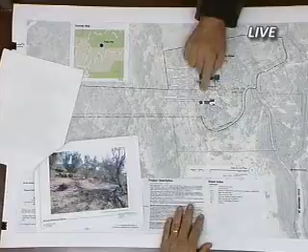There were, going up here, these old tall, thin cypress trees that the fire department hates. Well, they all became torches except for one or two of them. So all of those have been removed, because all of them except for one were completely gone, and it was half gone. So that was mostly the vegetation going up there. It had kind of a staircase effect going up with those trees to the top level, which was a little walkway, and then they had some of the olive trees out here on the outer side.

So the development of these structures isn't affecting any trees right now? Are we taking down any trees? No, there's a burnt out olive stump that I look at. It's on the side. It's quite a big old olive tree, but it's just a hollow stump with a little shoot growing from the ground. That's all I can see. It's quite clear, basically like this. And this part here was planted terraces and slope before.

Okay. Board members, questions? Yes, how does an adobe burn? Fire gets on the inside. What happened was it had old fragile windows, not modern standard windows, very old wooden ones. And what the firemen told us is the fire got on the inside, and it got to be like 3,000 degrees inside the house. They even had a Viking stove that literally melted to the floor. There was literally nothing left at all.